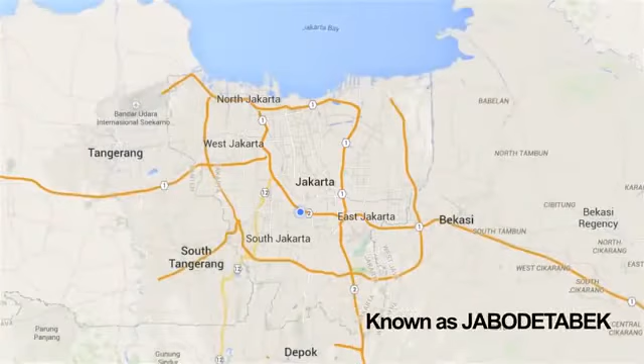Known as Jabodetabek, a name formed by combining the initial syllables of Jakarta, Bogor, Depok, Tangerang, and Bekasi, it is the second largest in the world, yet the metropolis's suburbs still continue beyond it. With 28 million people in the metropolitan area, nearly 10 million vehicles in daily use, and a limited rapid transit system, Jakarta is strained by transportation problems.

The alternative solution to Jakarta's transportation problem shall be providing mass rapid transit that is environmentally friendly and powered by electricity. By adopting the system utilized in other countries such as Singapore and Japan, the Government of DKI Jakarta established the organization that is fully responsible for all activities starting from engineering service, construction through operations and maintenance. The organization is PT Mass Rapid Transit Jakarta.

Rail-based MRT Jakarta will stretch over 110.8 km of Jakarta roads, consisting of a South-North corridor of about 23.8 km and an East-West corridor of about 87 km. This project is funded through a step loan by JICA and includes the first subway line in Indonesia. The construction of the South-North corridor that stretches from Lebak Bulus to Kampung Bandan will be carried out in 2 phases.

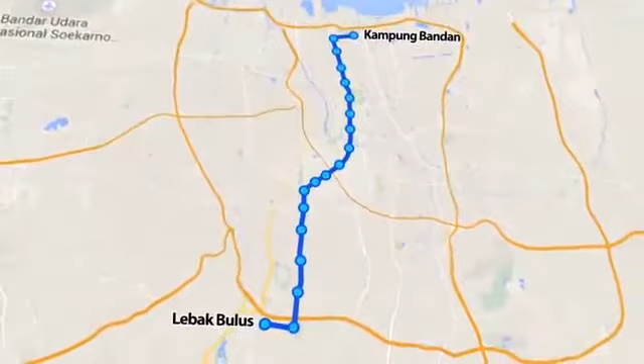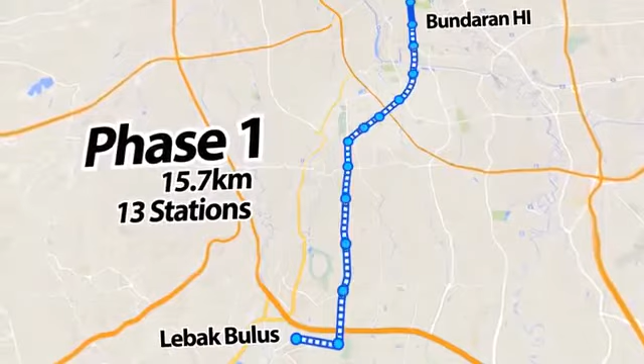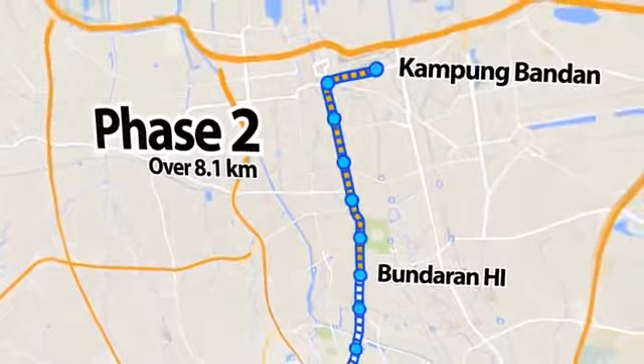Phase 1 will be carried out to connect Lebak Bulus with Bundaran HI over a 15.7 km railway with 13 stations, 7 elevated stations and 6 underground stations, which is targeted to operate by 2018. Phase 2 will expand the South-North corridor from Bundaran HI to Kampung Bandan over an 8.1 km railway, whose construction will have been initiated before Stage 1 operates.

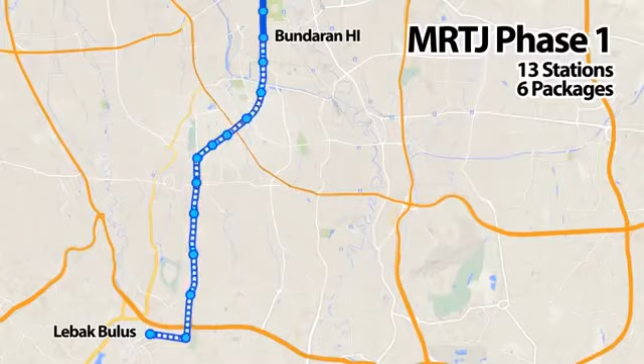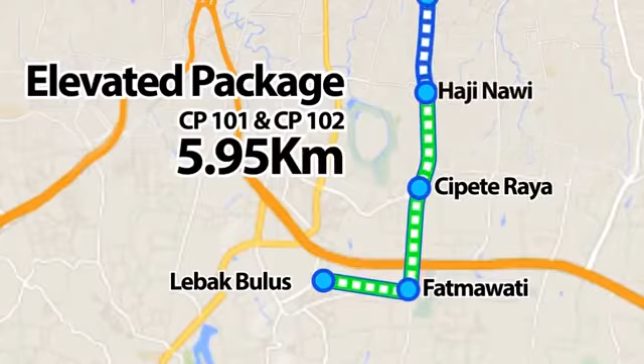The construction of MRT-J Phase 1, which includes 13 stations and 6 packages, has commenced since August 2013. Elevated packages CP101 and CP102 consist of Lebak Bulus, Fatmawati, and Cipete Raya stations along 5.95 km. Elevated package CP103 consists of Haji Nawi, Block A, Block M, and Sisingamangaraja stations along 3.84 km.

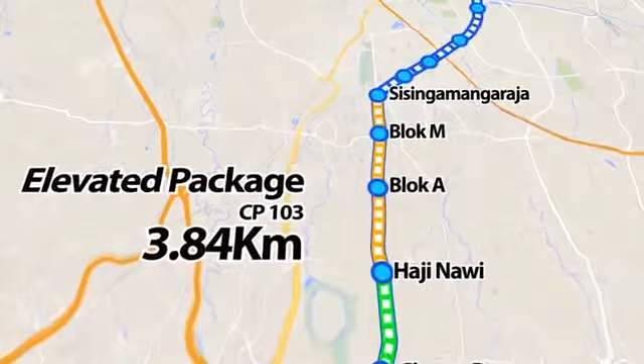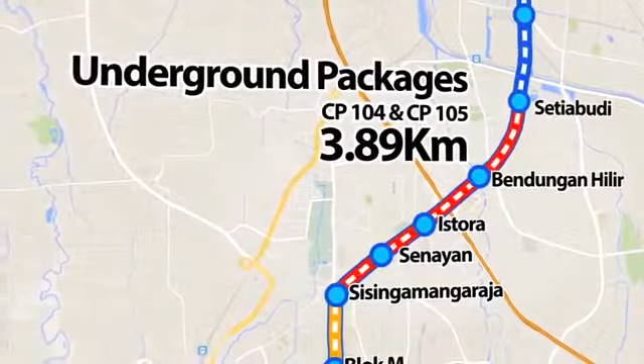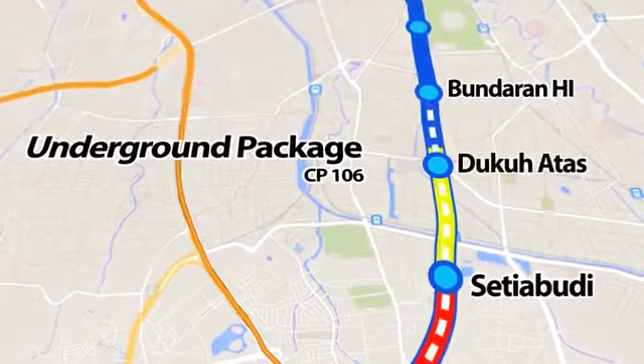Underground packages CP104 and CP105, which consist of the transition area Senayan, Istora, Bendungan Hilir, and Setiabudi stations along 3.89 km, are carried out by Shimizu Obayashi Corporation from Japan, Wika and Jaya Konstruksi from Indonesia. Underground package CP106 consists of Dukuh Atas and Bundaran HI stations along 2.02 km.

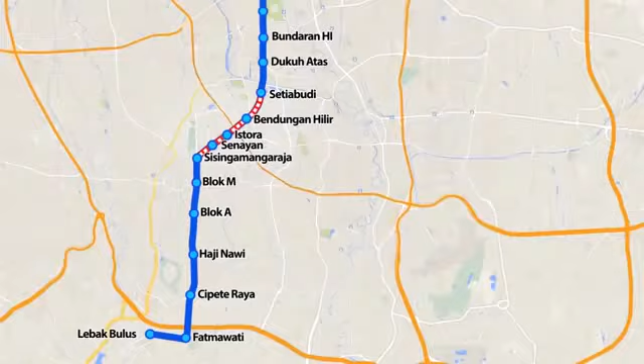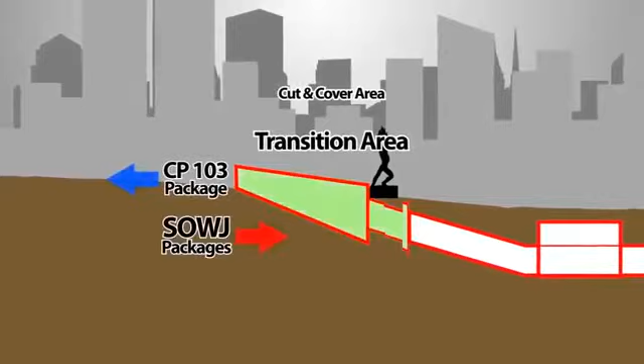SOWJ is the abbreviation of the Shimizu Obayashi Wika and Jaya Konstruksi joint venture, which constructs the CP104 and CP105 packages. Those packages are underground packages that include transition area, station and tunnel construction with a total length of 3.89 km. The transition area, or cut and cover area, will be located from Sisingamangaraja Road until Bundaran Senayan along 460 meters. This area is a transition from the elevated structure of the CP103 package to the underground structure of the SOWJ packages, which will be constructed by the soldier piling method.

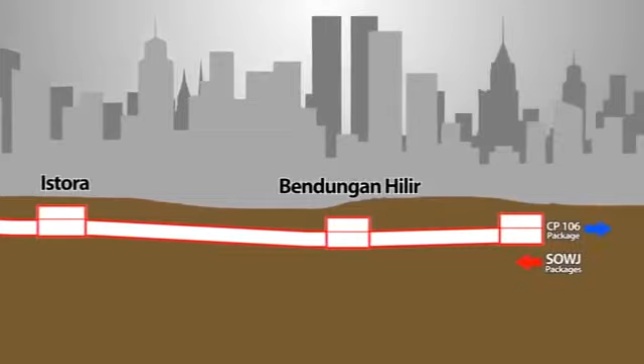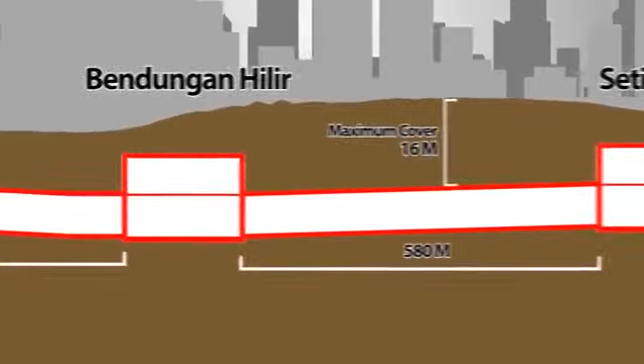There are 4 stations, Senayan, Istora, Bendungan Hilir, and Setiabudi, that will be established. Distance from the cut and cover to Senayan station is 322 meters. Distance between Senayan and Istora station is 630 meters. Distance between Istora and Bendungan is 1080 meters, and distance from Bendungan to Setiabudi is 580 meters. Length of each station is 200 meters, except for Istora station, which will be 220 meters.

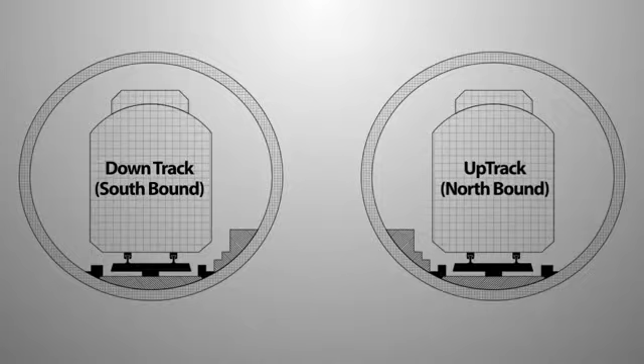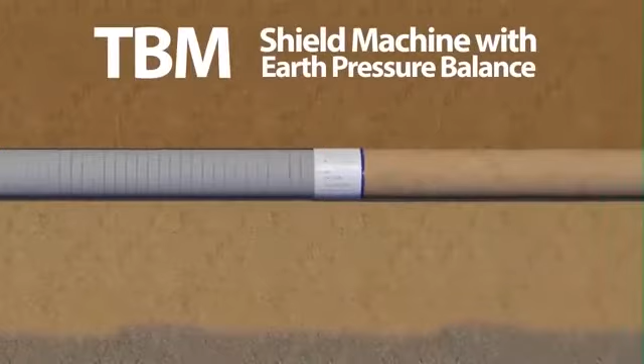The tunnel structure is for the railway of the MRT-J train. The tunnel structure consists of 2 lanes, the down track or southbound, and the up track or northbound lane. This facility construction will be conducted by tunnel boring machine, also known as TBM. The TBM that will be used is a shield machine of the earth pressure balance type. The required inner diameter of the tunnel is 6,050 millimeters. This tunnel is completed by reinforced concrete segments as the supporting lining structure.

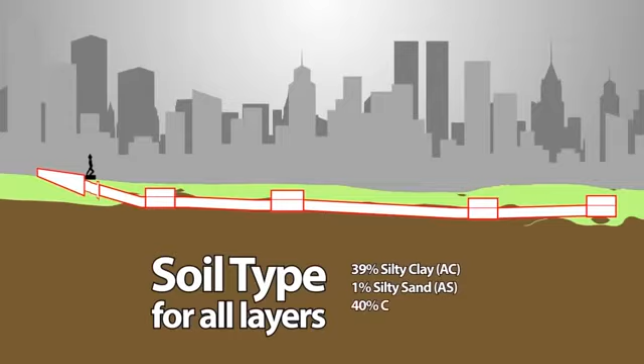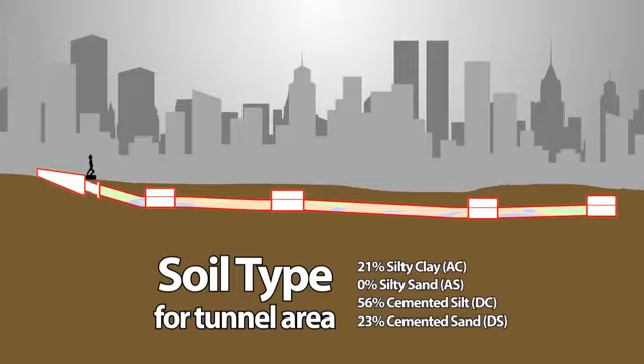According to the geotechnical report at the CP104 and CP105 project location, the tunnel alignment along Jalan Sisingamangaraja through Jalan Sudirman consists of 39% silty clay, 1% silty sand, 40% cemented silt, and 20% cemented sand soil types. This soil condition will affect the type of TBM utilized for this project. The majority soil layer passed through by the TBM is cemented silt. Due to that condition, the type of TBM selected for this project is the Earth Pressure Balance Shield Machine.

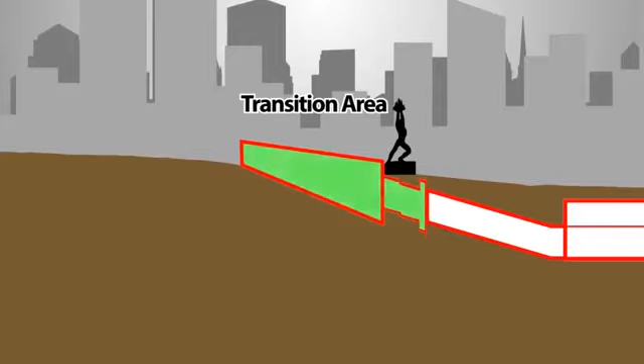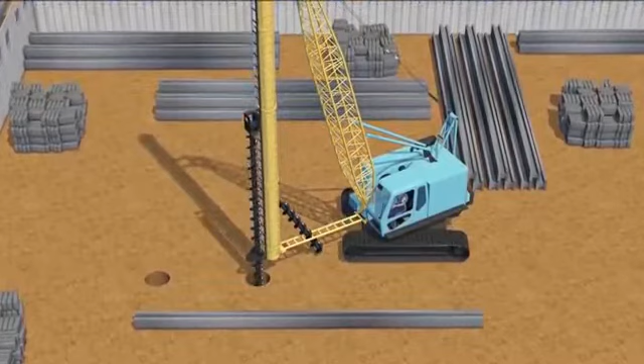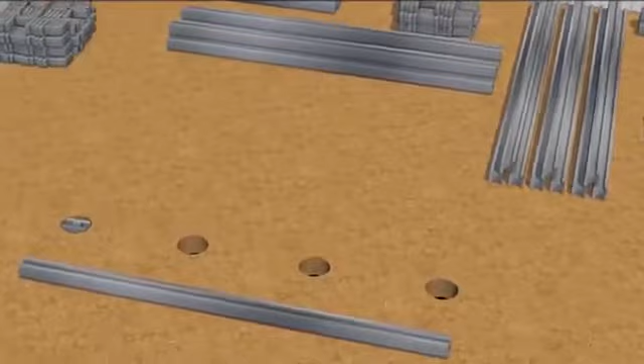The cut and cover area is located in Sisingamangaraja Road, bordered by the CP103 package, until the Pemuda Statue at Senayan. This area is the transition from elevated structure to underground structure. The cut and cover area is constructed using the soldier piling method. H-beams will be used as the major material of the soldier piles. Before driving the piles, position alignment and orientation of the piles must be established. Piles will then be driven by a vibrator hammer unit into the marked position. Piles shall be driven in a straight vertical position, otherwise driving will be difficult. All piles will be inspected for excessive camber or sweep.

After completing the soldier piles, excavation of the first layer will be carried out. Then a temporary deck and the first waler strut will be installed. Excavation of the second and third layers to the base will be continued. The bottom layer will be completed with blinding stone and lean concrete. The base slab concreting process can then be started.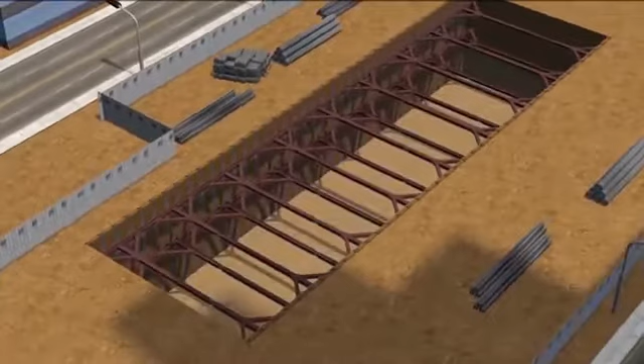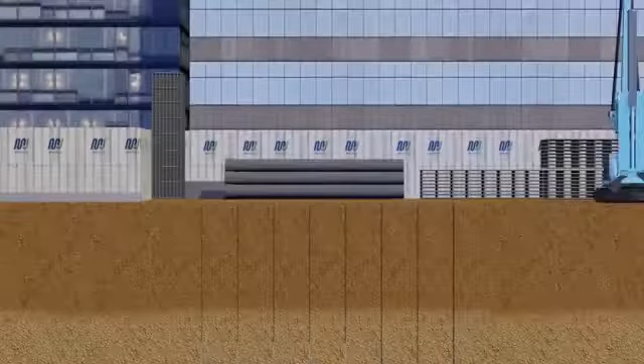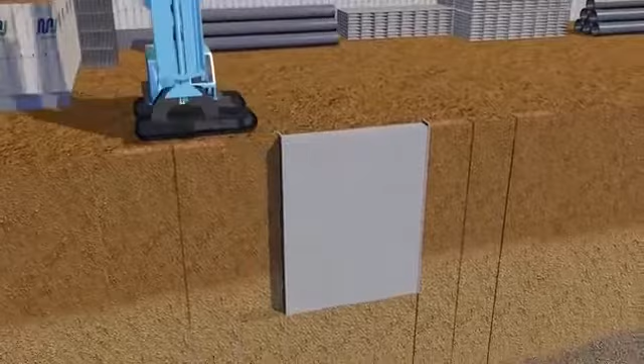The station is constructed using a top-down method. In order to retain the soil and water pressure while commencing a deep underground excavation for main station boxes, diaphragm walls will be constructed. The trench is excavated using a mechanical and hydraulic clamshell, and then a reinforcement bar cage can be lowered down into the excavated area. The next step is pouring the concrete, which is carried out by Tremie method. This cycle is repeated for all 4 sides of the station.

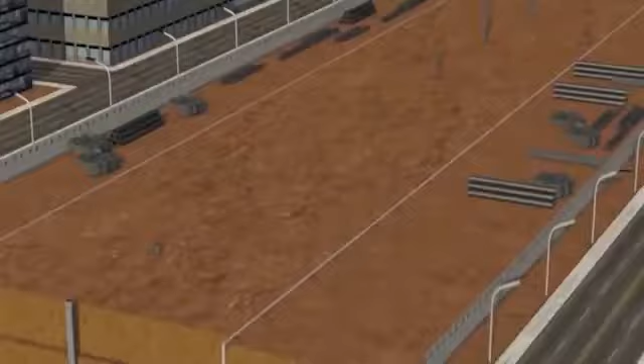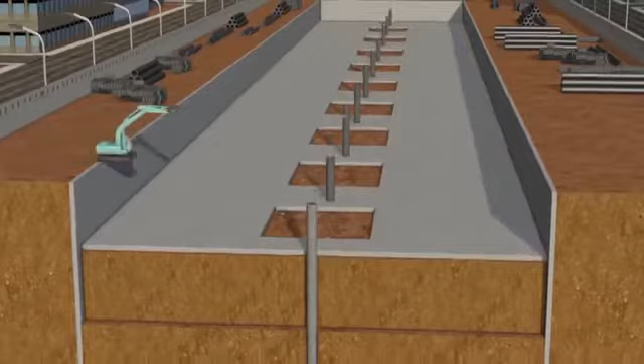The diaphragm walls will function as temporary retaining walls during construction and also as a permanent retaining wall for the station structures. Before starting the excavation process, king posts must be installed as a temporary support for the roof and floor slabs. The first excavation will be conducted and followed by the casting of roof slabs. With openings around the king posts, the second excavation can be conducted.

After installing the concourse slab, a concourse column will be cast, and then the third excavation can be conducted. Before casting the base slab, blinding stone and lean concrete will be installed. The final process is backfilling the roof slab with soil and compacting it by grader and vibro roller.

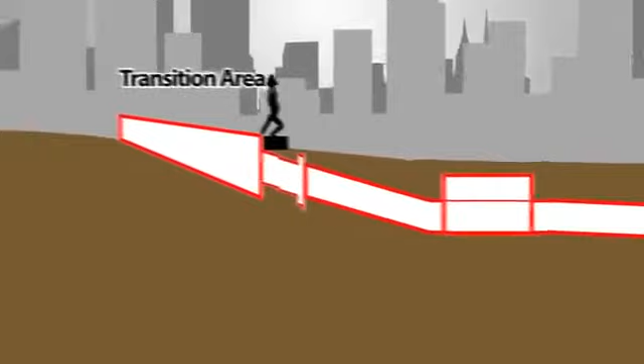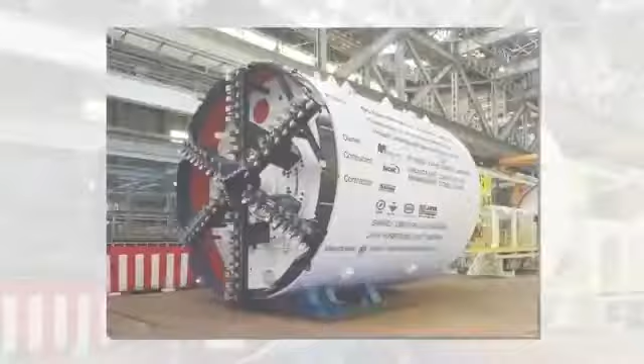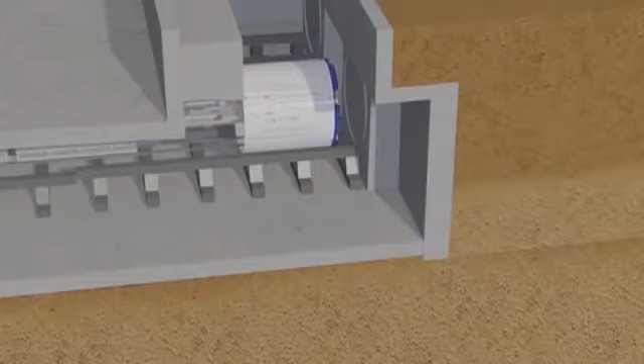The EPB shield machine is not designed as a whole complete component. Shield machine assembly is located at the launching shaft beneath Pemuda Statue Senayan. This machine is formed by some parts which have special functions for the tunneling work. When the TBM is completely assembled, it will be positioned facing the tunnel eye seal. The TBM will then slowly proceed forward. The tunnel eye will be broken by the TBM roller cutter. The TBM will then break out of the launching shaft and enter into the ground.

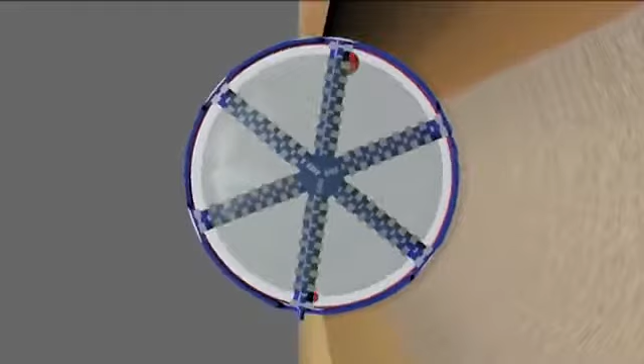The cutter head is the main component for excavating the soil. This project requires a circular spoke type cutter head structure and flat front shape. To simplify the excavation process, a chemical injection will be required to produce a soil excavation result that is suitable for discharge by the screw conveyor. The chemical will be injected both at the face of the cutting wheel and within the cutting chamber. This chemical will be mixed with excavation material by rotation of the cutting wheel and the mixing arms.

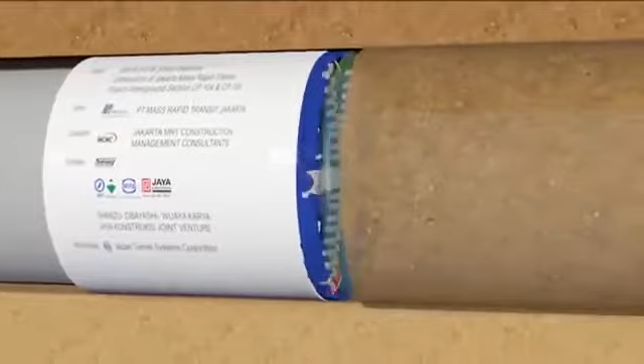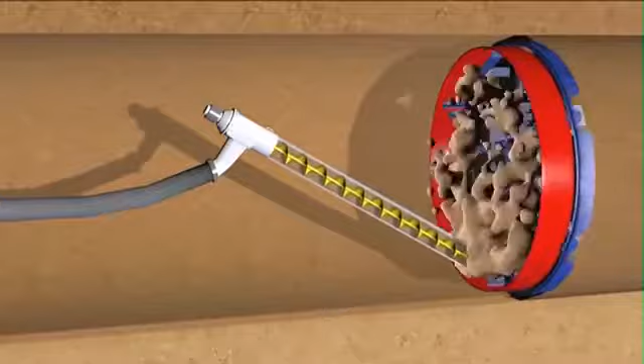After the cutter head rotates to excavate the soil, the disposal will be transported to a screw conveyor. The screw conveyor is used to deposit excavated material from the cutter head chamber onto the hose along the backup car. Soil disposal as a result of excavation will be transported from the screw conveyor to the hose system. The screw conveyor has one gate for muck disposal passed into the 14-inch hose. This hose will end at backup car number 1.

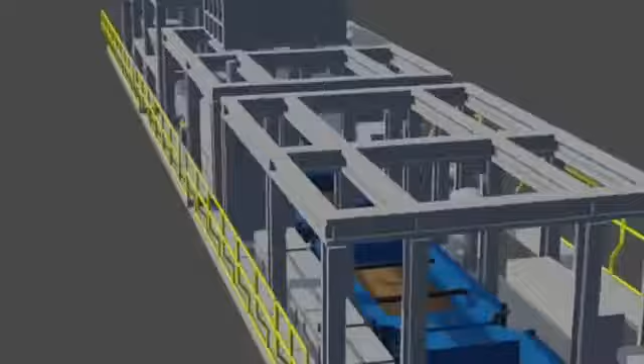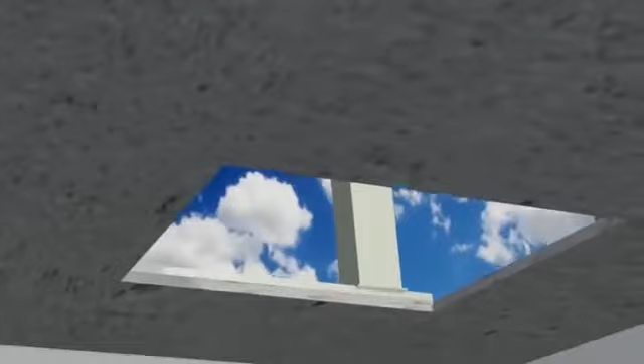Soil disposal from the backup car area will be delivered by muck car to the cut and cover area. The full muck car will be hauled back to the opening by locomotive, hoisted to the surface and emptied into the muck pit. Another locomotive will go back to the TBM carrying the concrete segments and 3 empty muck cars.

After the excavation cycle is complete, the shield jacks are left locked onto the previously built tunnel rings to keep the TBM tied into the tunnel face, and only enough shield jacks will be removed to allow the placement of one tunnel segment at a time. The segment erector can pick up the first segment from the erector pickup area and place it in the correct position in the invert of the tail skin. Each segment is 1.5 meters wide with 25 centimeters thickness.

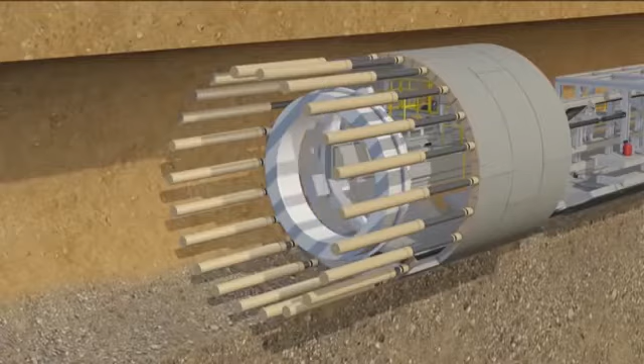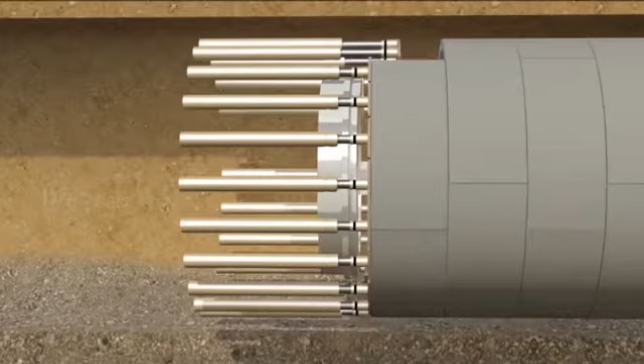The segment hoist is then operated to place the remaining segments into the erector pickup area. The ring build is completed by inserting the key segment and tightening all the segment bolts. After the 6 segments have been installed properly, the shield jacks will then push forward and the excavation will continue.

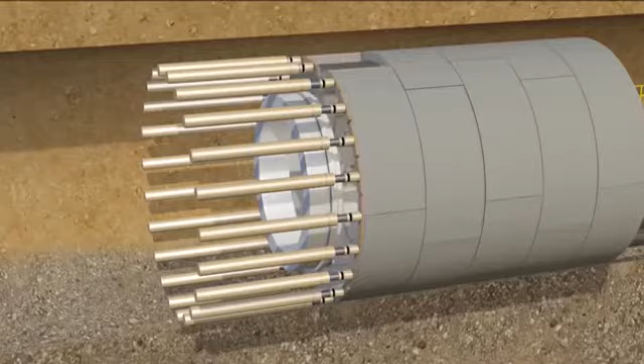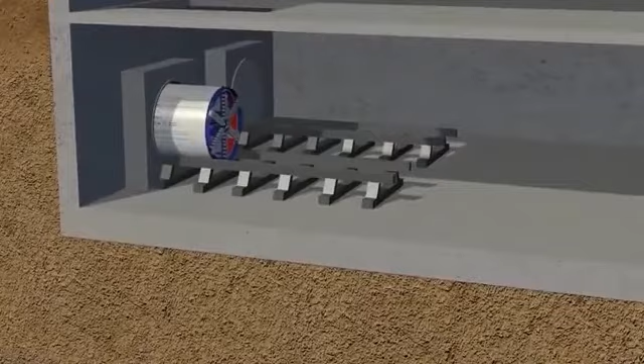The tunnel is finished by installing a concrete invert, which is a permanent structure for the bed track of the MRT Jakarta railway. When the machine has reached a designated distance, the machine will arrive at the stations. The final arrival is at Setiabudi station. And then the machine can be dismantled. One by one, the machine parts will be hoisted up to the surface.

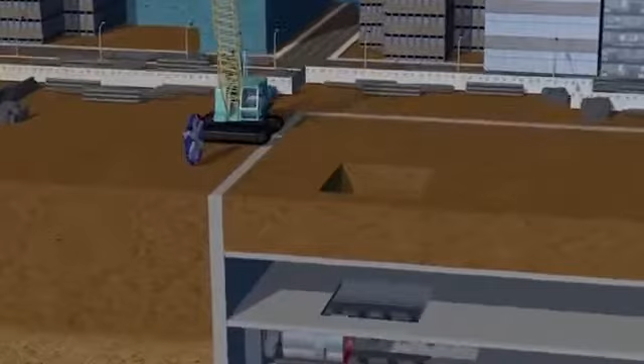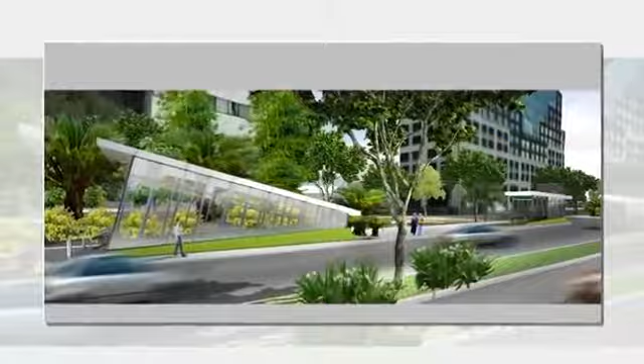After completing the station and tunnel structure, the next step is to install all the mechanical and electrical components, including architectural works. All stations' entrances and exits will be located at the pedestrian area for easy access for MRT Jakarta passengers. MRT Jakarta Phase 1 is expected to carry 412,700 passengers each day. Travel time between Lebak Bulus Station and Bundaran HI Station is only 30 minutes with 5 minutes headway.

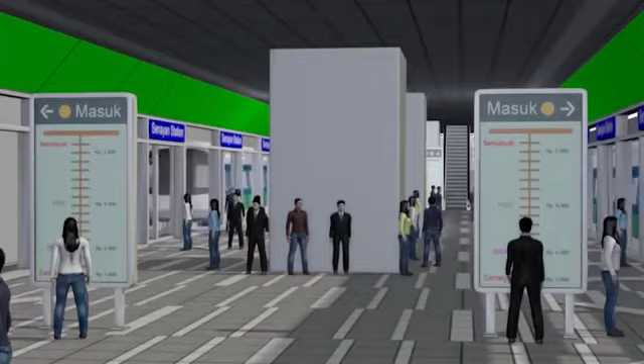This indicates that the target of this operation is for MRT Jakarta to be the primary alternative of public transportation. The final impact of MRT Jakarta will be to reduce the level of traffic jams and pollution in Jakarta. Traveling in comfort and safety will be experienced by Jakarta citizens with this MRT Jakarta operation.